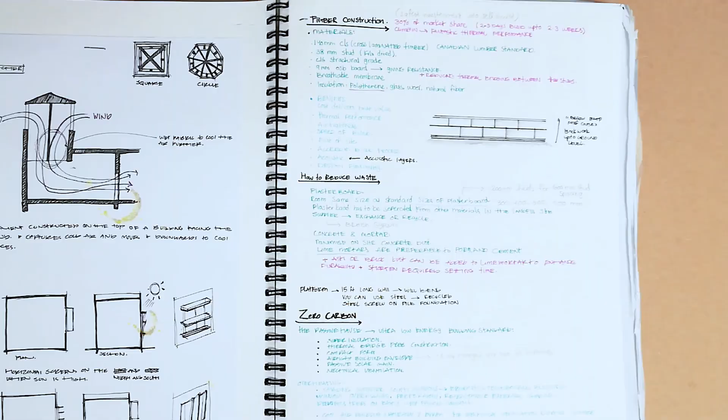So I've done some research on passive sustainable methods and construction, and then I landed on prefabricated timber construction, which is proven to be more eco-friendly than traditional masonry construction.

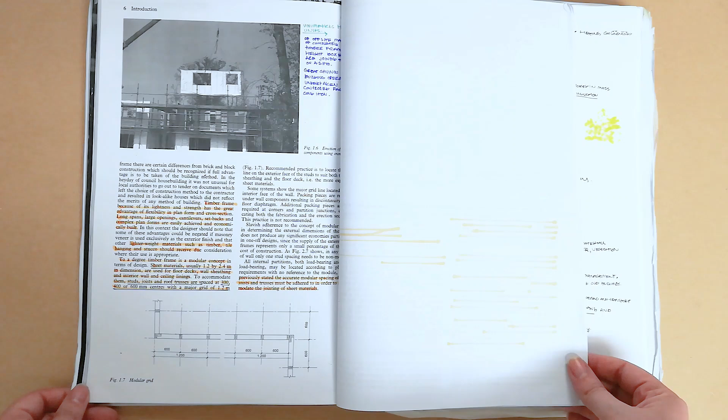These printouts are from a book called Design and Build in Timber Frame, explaining the different types of timber frame construction. One is called post and beam, while the other is platform frame. There's also balloon frame, however that type is mainly used in the US.

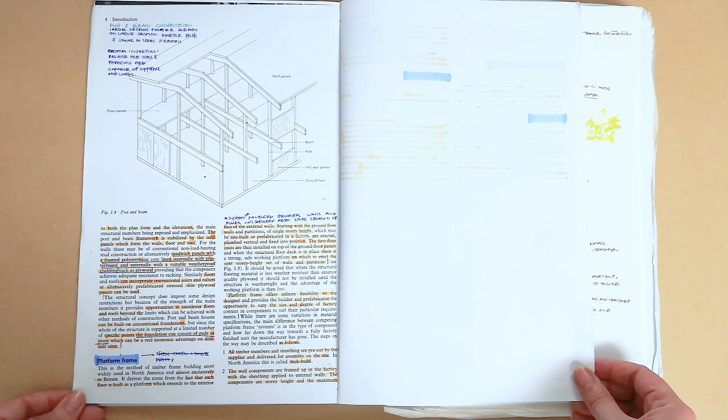I love printing out articles or research from time to time, as it makes it easier to highlight and add notes to, compared to writing everything yourself, which takes ages, let me tell you that.

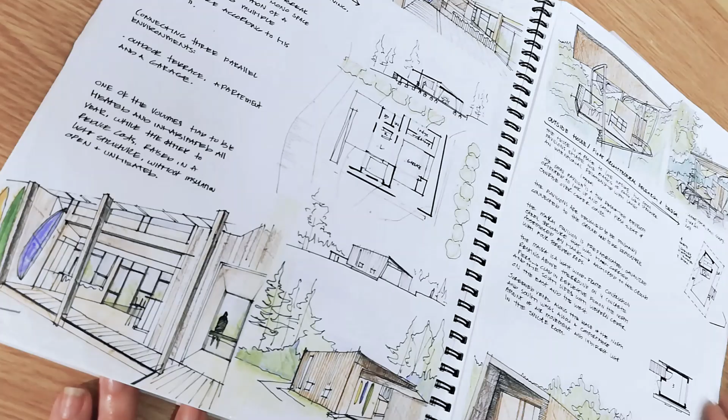These pages are more research into the science of zero carbon and a few examples of zero carbon houses. These pages are probably the best pages of the sketchbook, which are my precedents. I always say that your project is as good as your precedents, so choosing good quality precedent studies is a really important step for me, and these projects do not disappoint.

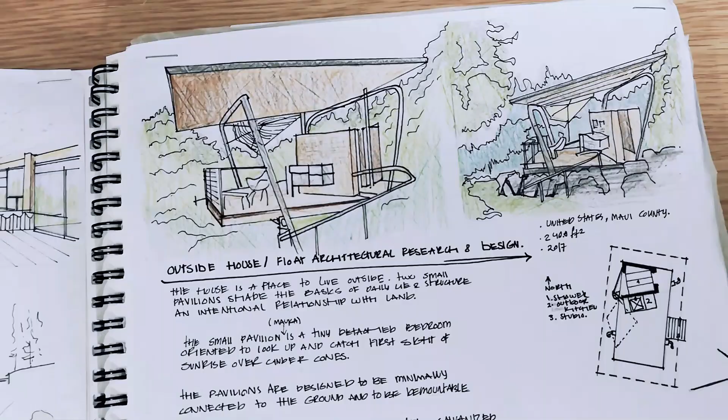I then started sketching out my concepts, and for me, my design method is using different volumes with different heights and roofs, and then connecting them to create the architecture.

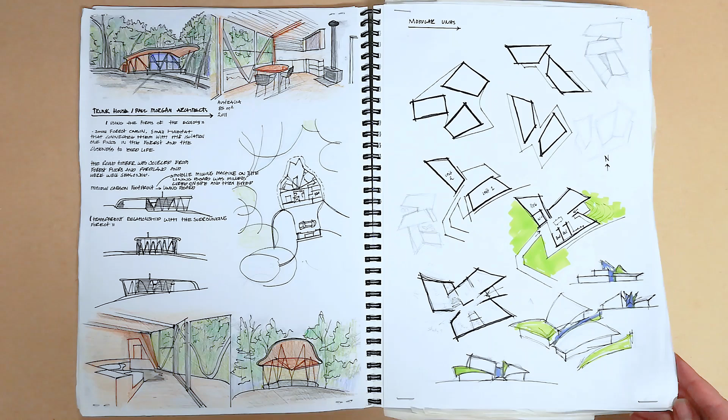I tried to make the Edgeland house, which I mentioned in my last video, based on modular units, but it didn't work for the type of house I needed and the area, because that house is huge compared to zero carbon houses, which are often compact. I'll have that video linked in the cards for you to check out, as the houses I share and the lessons from each project are very valuable to architectural students.

Afterwards, I came up with this scheme, which I thought was interesting and was heading to where I wanted to be.

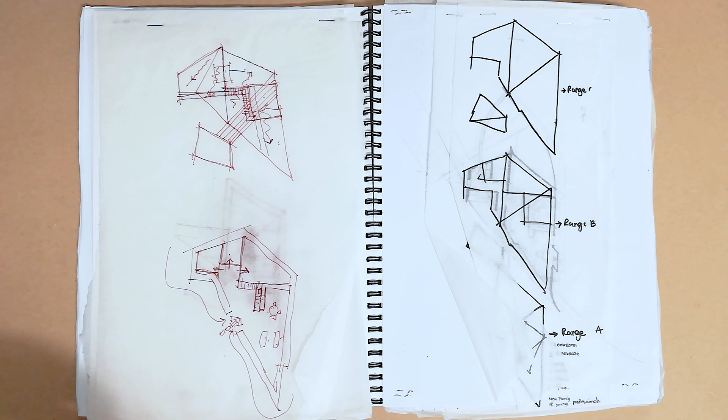Here I was finalizing the type of construction I'm using, which is platform frame construction using SIPs panels. I would highly suggest watching my previous axonometric tutorial as I go into construction in more detail.

We had at this point stage 1 presentation, which was an informal sit down around the table and just having a chat about our projects and such.

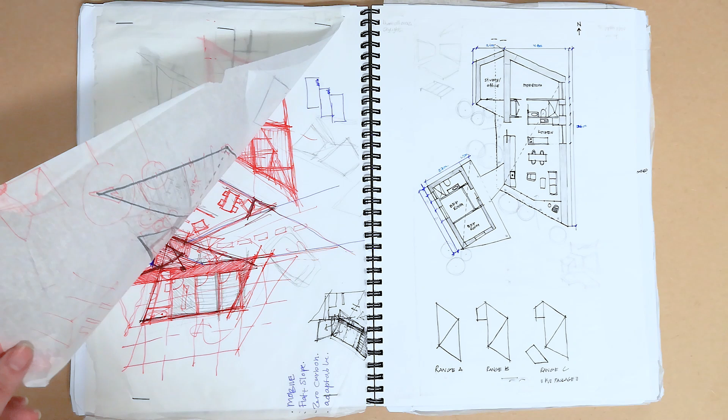This is what I presented, so I had a pretty decent modular floor plan with different ranges. For example, the client can purchase the large unit and then purchase the private office or the additional 2 bedrooms in the future. It needed more refinement and just a few pizzazz ideas here and there just to make it more special.

And the next page was showing the sections. It kind of showed the idea I was trying to achieve, but just not quite there yet, but almost.

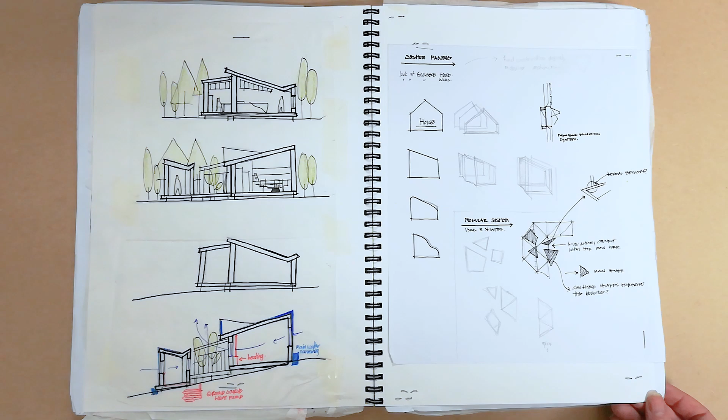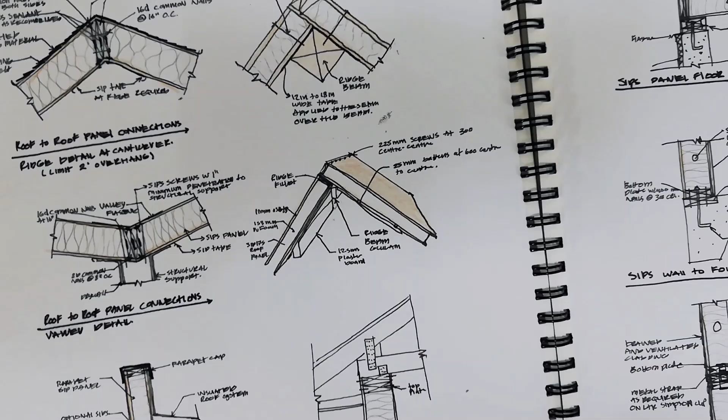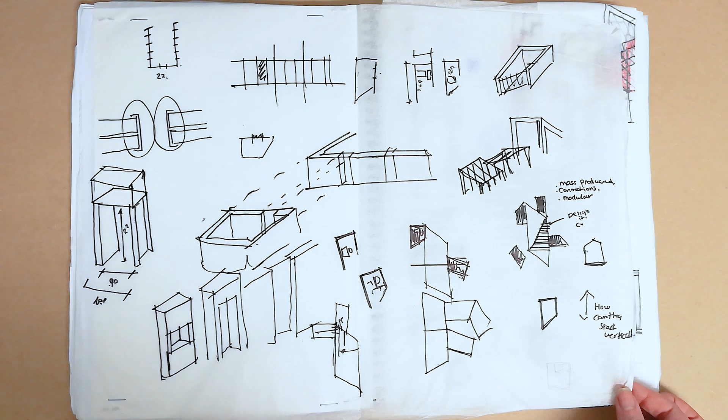Unfortunately, this is where things changed. I met with a lecturer who explained the project to me differently. He said these units I'm adding to the building, the so-called accessories, should all be one shape and the same height, and they all must fit into the lorry. I'm always fascinated with the sculpture work of Frank Gehry, so I took it as a mission to make Frank Gehry's architecture modular and eco-friendly.

So I started sketching out some different shapes and how they could be combined, while also working on CAD to create a basic rectangular plan to figure out how these units will work.

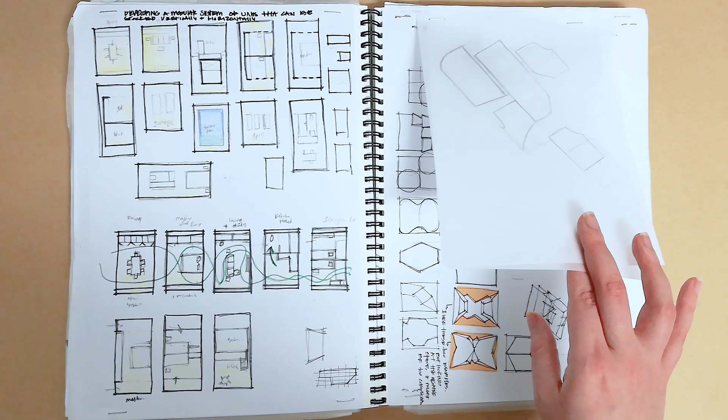He then said not to have different proportions, meaning the basic unit is a square, and if I need more space I'll fit more units together to create wider or longer units. Which makes sense, but I felt literally boxed in.

The size that fits in a lorry is about 2.5 by 2.5 meters, so all the crazy ideas I was so excited about at the beginning of creating an original house just turned into dust, and ended up being a house fit for mass production. I'm not saying that's a bad thing, I'm just saying the project didn't end up being what I was hoping for.

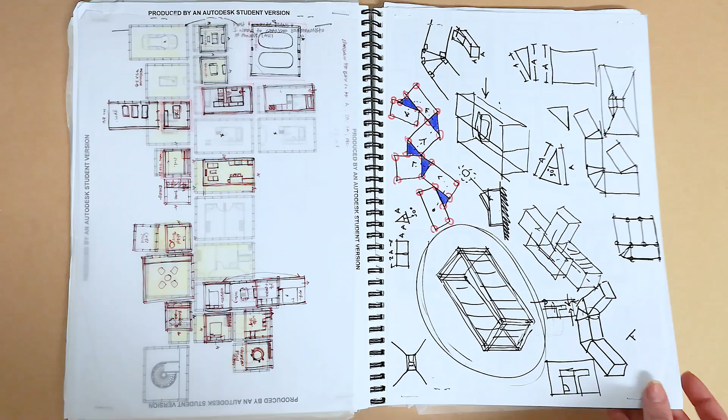With the final presentation approaching, I couldn't do any more sketching and designing, and just had to go with the cubes. These were the finalized units.

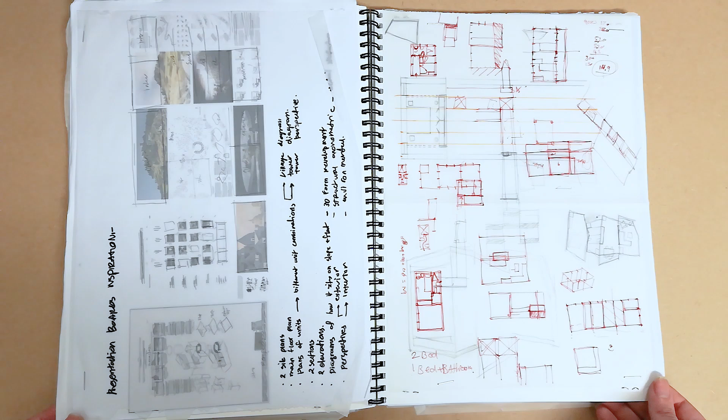So here I prepared my presentation board in Photoshop by combining different boards, then printing them out and sketching over it, a technique I've already shared on the channel in another video, which I'll link in the cards.

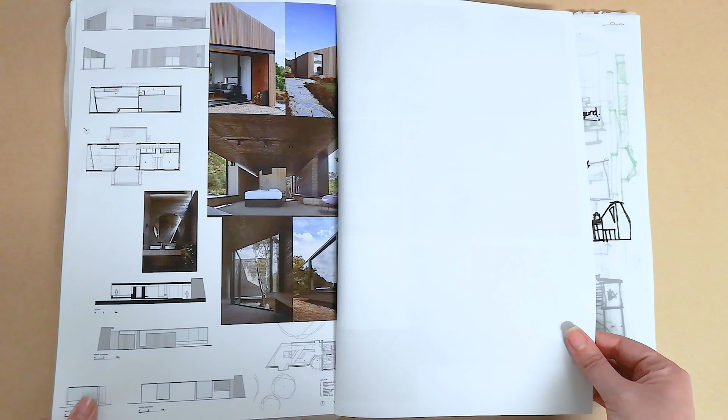Three days before the presentation, I printed out a lot of inspiration images from projects and just went crazy with sketches. I came up with a plan that I'm pretty happy with.

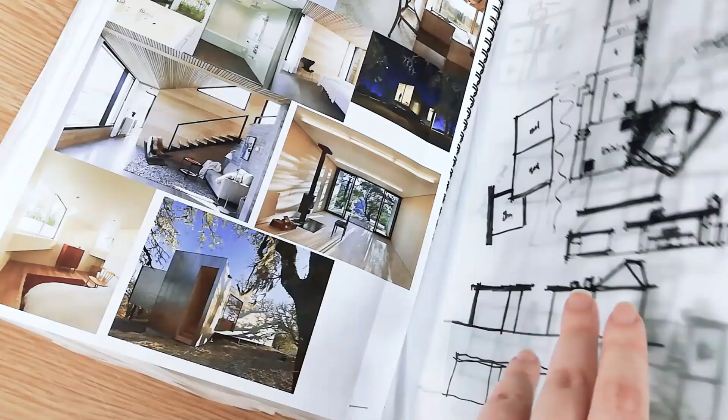These are my presentation boards that I presented. I like printing them on A4 and adding them to my sketchbook, as I think they show the whole journey of the project. And these are the plans and all of the drawings.

There's one thing that's annoying me about the plan, but I won't say what it is, to see if someone points it out first.

We aren't graded for this presentation yet, as our final submission is in January. We were told we had to explain how the design is flexible, but also had to actually show different schemes. So in January I have to produce different schemes, sections, elevations, and perspectives of how these units could work, which is a lot of work.

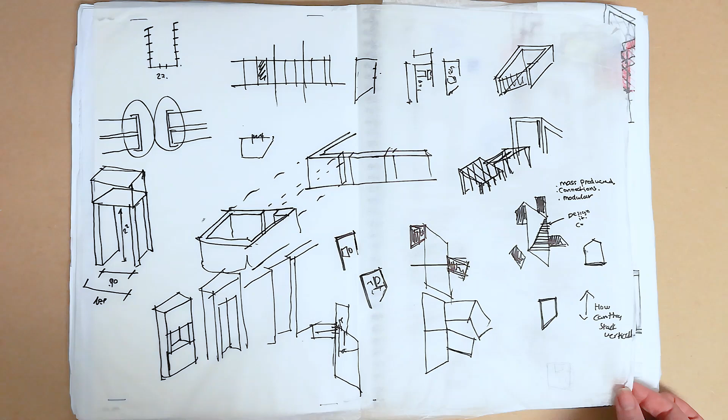And that's not to forget I also have a dissertation, plus a theater renovation project on the side, plus YouTube. So I'm not sure if one of these schemes should explore the idea of the sustainable Gehry design, or if I should just continue with cubes, because I have other submissions, and now we're starting this new project. Even if I give up sleep, I won't get everything done on time. So any advice or inspiration would be really helpful and greatly appreciated.

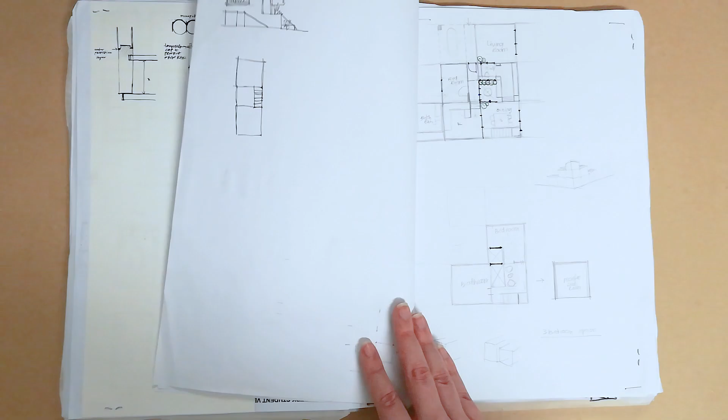Before I leave this video, I just want to say that sometimes that's what happens in life. You submit something you're not proud of, not 100% happy with, but I guess that's fine, because this theater project I am super excited about, and I'm highly motivated to make it something I'm very proud of. That is all for today's video.